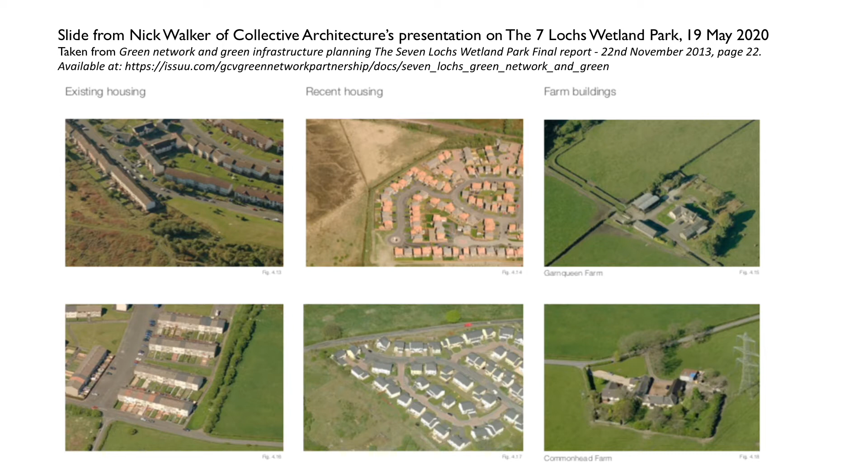Good morning, everyone. I think all of us were collectively horrified at Nick's slide last week, so that prompted me to offer this talk on shared space, which I hope will illustrate what I think the right approach should be, but also why this hasn't been adopted and what we might do about getting it adopted.

There are all sorts of different names, but they all refer to the same thing. The critical thing is, if it's the public realm, use that word clearly, then the public should rule in it. I prefer shared space rather than home zones, because home zones suggest there can be little ghettos of safety for human beings, whereas the rest of the world is dominated by vehicles. Shared space is the approach you should adopt everywhere, except on seriously mainline roads like motorways. And streets rather than roads - streets are for humans, roads are for vehicles.

Fundamentally, in every aspect of whatever we do - it doesn't just apply to laying out the urban environment - people always come before things or abstractions. And lastly, given that land is a very scarce resource, they're not making any more, there should be a proper allocation of land and resources, and not just using it willy-nilly if that produces the best short-term profit.

We saw Nick's scheme. Here is one just as bad in a different way. Although this is relatively recent, it's probably 15 or 18 years old. It was land sold by the City Council to a housing association who appointed an architect who designed it and then took it through the planning system.

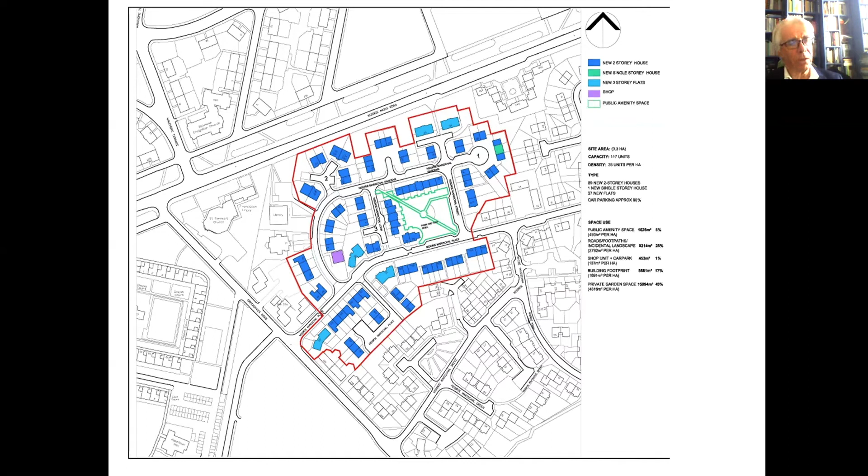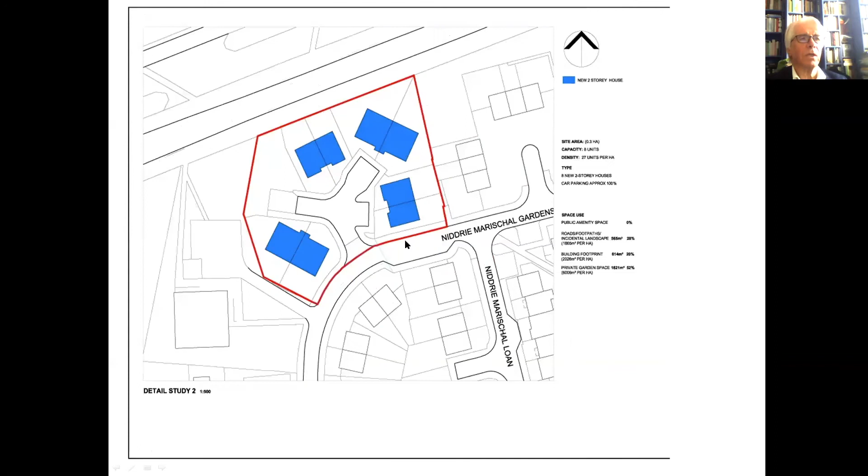The dead space lying around is just thoughtless. There's loads of slope in it and all the rest of it. Then look at number 1 and 2, which we'll look at in a little more detail - look at the amount of roadway built for 8 houses.

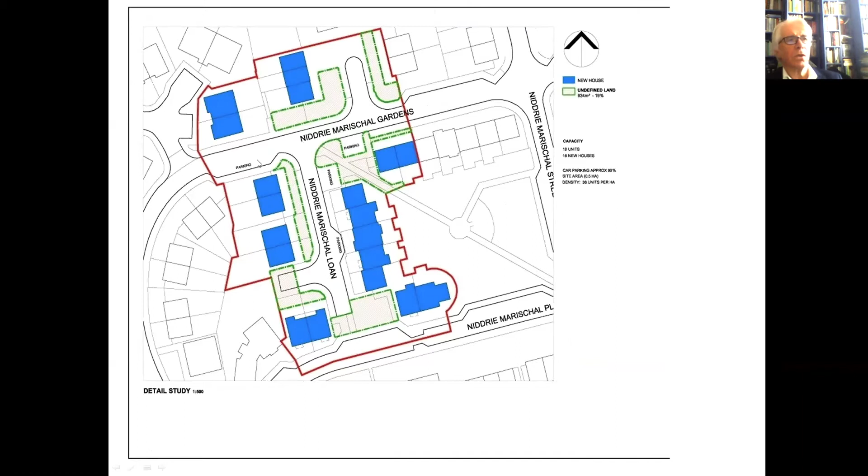If we move on, here's another one. And it's not only the useless road they develop in these schemes, it's the leftover space all the time, which has no social role or purpose - outlined in green here. It's just useless space that is a cost to maintain, or it's hard standing and so on.

And the truth is, when you provide the road, they ignore it anyway. Look at this - it's a 2-lane road into a dead-end cul-de-sac. You can see all the houses facing onto it, and they still provide a big parking lane on the side. So it's a 3-lane entry, and yet the vehicle drivers can't be bothered to use the proper parking space or park in their driveway, they just park on the pavement. Because actually, the world is designed for vehicle drivers.

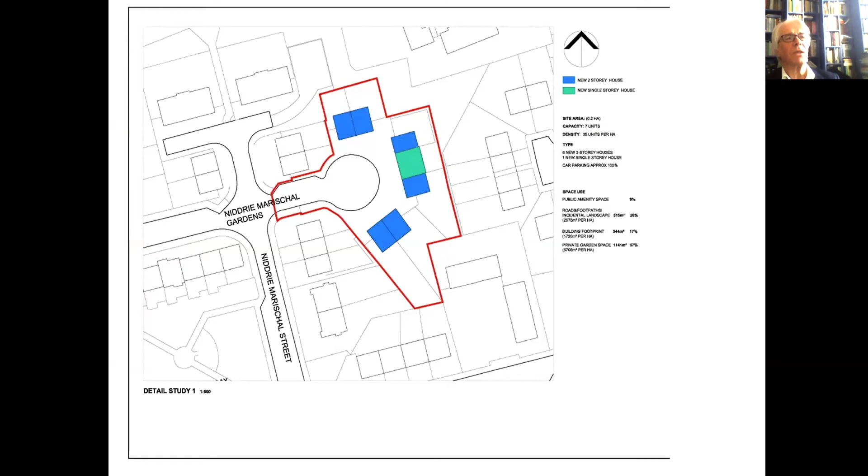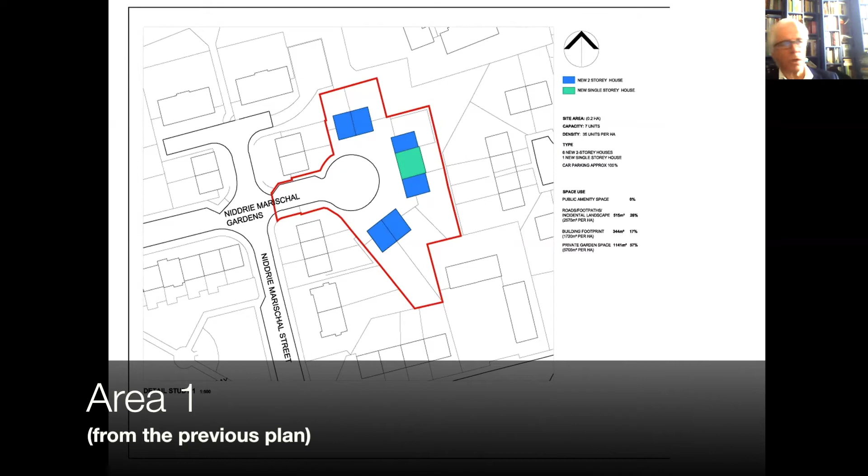Look how big this is for 7 houses. The purpose of this, of course, is to allow dustbin lorries to drive in, turn round, and come out nose first. And that's the result - look at that kid running across.

Imagine if that had been just a little stub and nothing more, and the space in front had been grass or private gardens, or even you could have done a much denser scheme with a bit more vitality and social housing. This is just a detour to Amsterdam.

In 1971, 80% of 7 or 8-year-olds walked to primary school on their own or cycled. By 1990, it had fallen to 9%. That's in a very short period of time. And we know why - because parents are scared their kids will get killed, and therefore they drive to school, increasing the problem even more, and so on.

So the public realm is space we share with a lot of other people and other functions. The thing is that traffic is just one of these functions, and it shouldn't be the sole determinant, as it is at the moment. And why doesn't it work? It's because where traffic is concerned, traffic behaviour has no social control and it's antisocial.

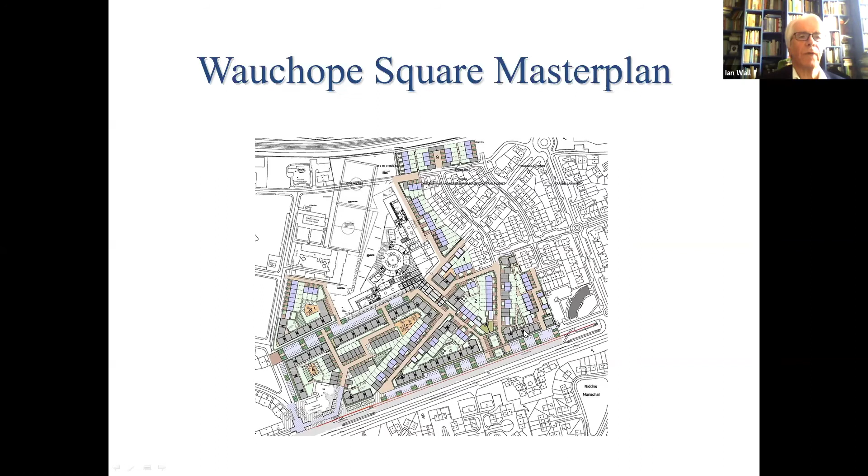You look at this and the way the road actually comes through the parking, it then turns here, it goes through this little park and down here, twists and turns and so on, or again round here. This block of housing is solid - that's a mews, you drive through an archway and so on.

That's the primary school. Because it's the central public building in the area, it's three storeys high to give it some presence and importance, and of course it's a school designed to be used by people outside of school hours.

And that's difficult to do in long straight streets designed to be travelled at 30 miles an hour, which all streets and residential schemes are by fiat of road engineers.

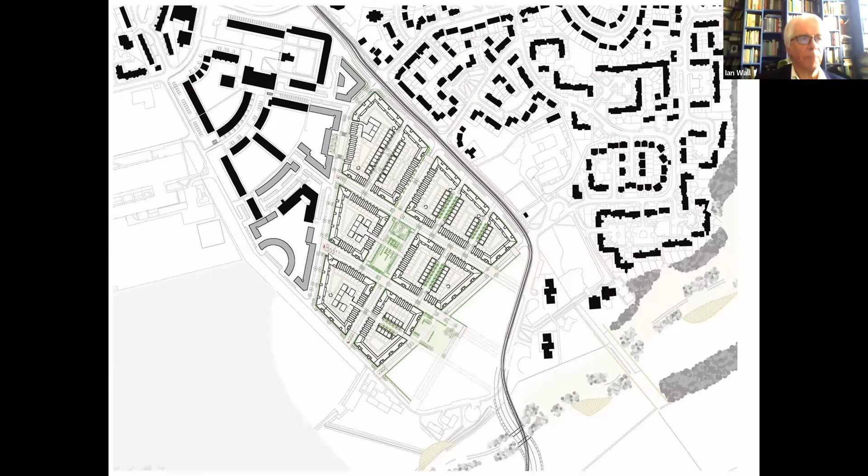One day when I was up there showing people around, they'd put a water slide up in the street, just running a tap from the house and blowing it up, taking up part of the street, but people would drive by it. The whole street was out enjoying it. It was a real joy to see.

The irony is that because traffic now doesn't drive up at 30 or 40 kilometers an hour, stop and wait with its engine idling and then move on, the air is much cleaner. The traffic moves more quickly than it did, so it's faster, it's cleaner, there are no maintenance costs of traffic lights, and there are no accidents. Of course, people negotiate by eye contact and treating each other equally.